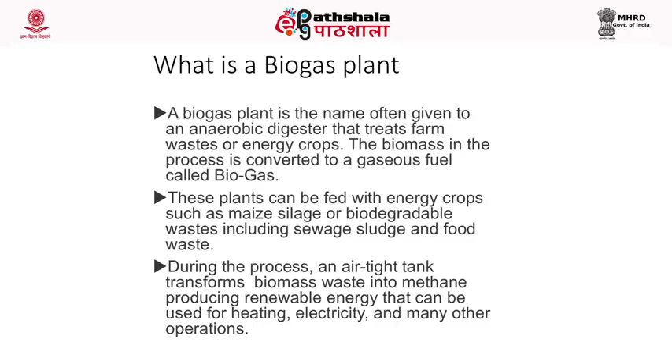The slurry obtained from the biogas plant is richer in nutrition and is an excellent organic farm manure. The next is the type of biogas plant.

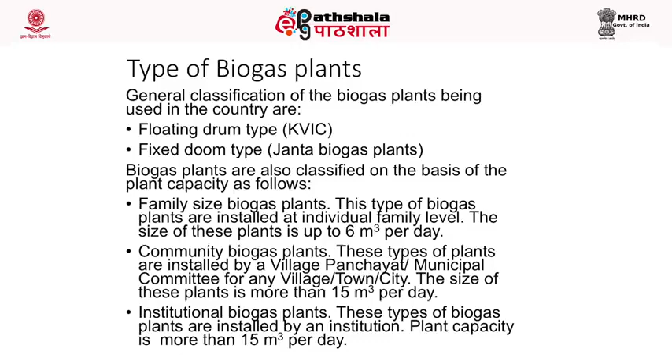The most important types of biogas plants used in India are Janta fixed dome type, and the second is KVIC floating drum type biogas plants. This Janta biogas plant is further divided into Deen Bandhu fixed dome type plant and Shramik Bandhu biogas plants.

Now the KVIC plant, which is a floating drum type of plant, has an initial cost of installation that is much more. KVIC means Khadi Village Industry Commission, and its initial cost is a little higher.

Cost of repair and maintenance during operation is relatively high. The steel gas holder needs to be replaced due to corrosion effect, generated due to water vapors and some organic acids formed during the anaerobic digestion process. Life of the digester is expected to be 30 years and that of the gas holder is 5 to 7 years, meaning it needs replacement after every 5 to 7 years throughout the life of the biogas plant.

The drum which is exposed over the ground does not allow the use of space over the plant for other purposes.

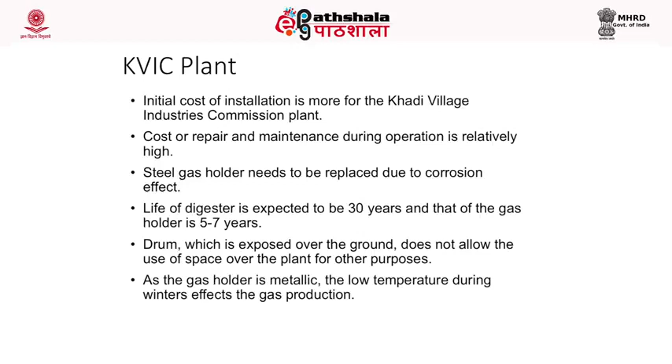As the gas holder is metallic, the low temperature during winters affects gas production. This means because of the lower atmospheric temperature, the temperature of the slurry drops due to the metallic gas holder, and the low temperature affects gas production and the bacteria as a whole. The gas production in winters drops significantly in KVIC plants.

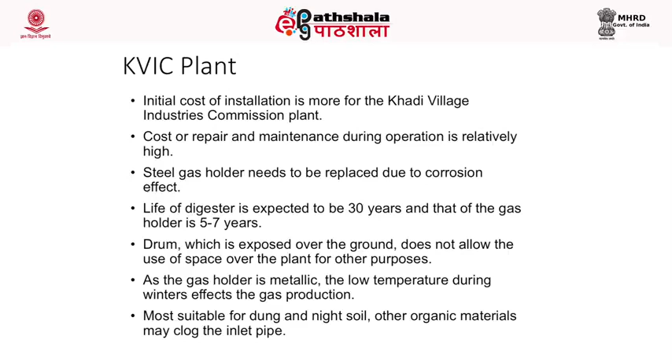It is most suitable for cattle dung and night soil and other organic material, and may clog the inlet pipes. So crop residues like straw, etc., if not properly ground, can cause operational problems in KVIC plants. But it is suitable for animal excreta and night soil.

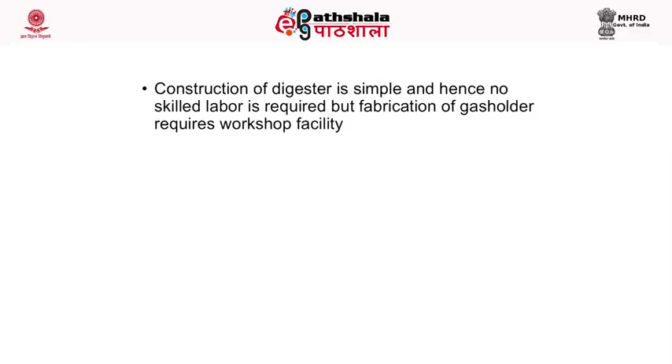Construction of the digester is simple, hence no skilled labor is required, but fabrication of the gas holder requires workshop facility. It requires less excavation work during installation.

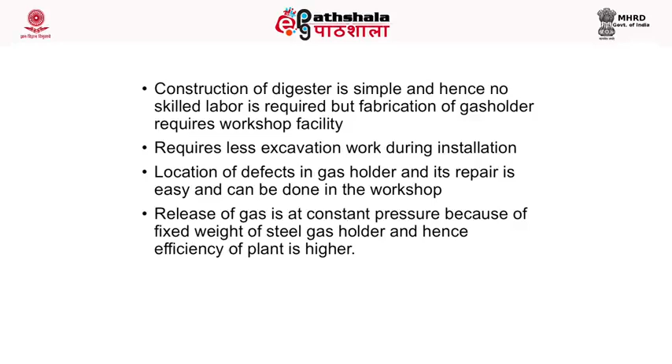Location of defect in gas holder and its repair is easy and can be done in the workshop. Release of gas is at constant pressure because of fixed weight of steel gas holder, hence efficiency of the plant is higher. Now these are some photographs of the KVIC biogas plants.

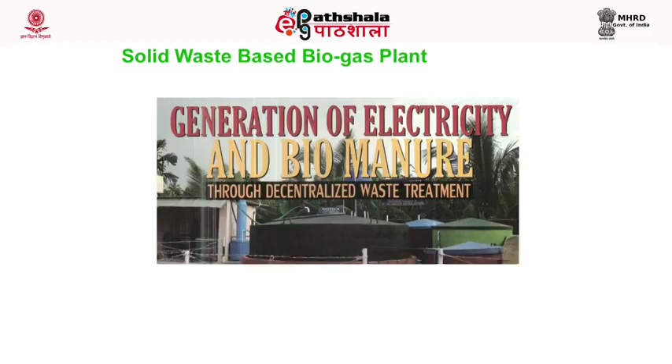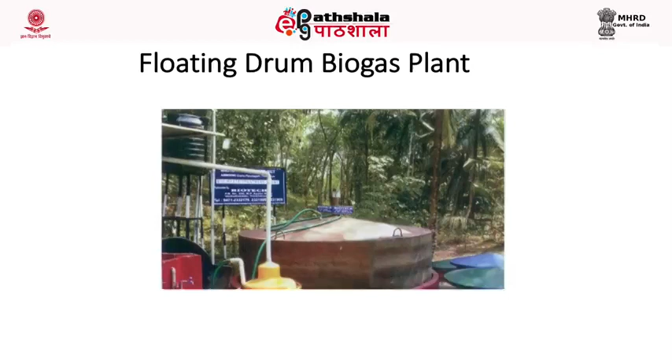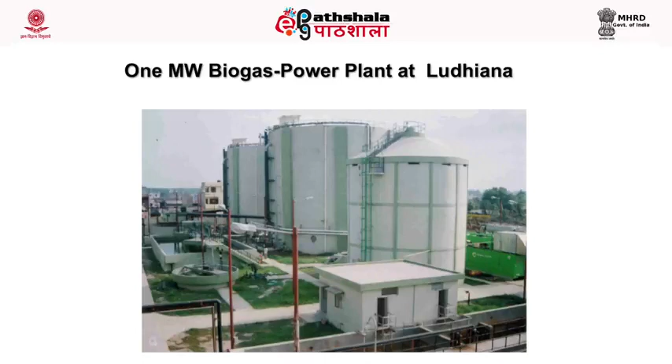Now this is another biogas plant, having a capacity to generate gas for operating a 1 megawatt engine. This whole plant is a 1 megawatt electricity generation system using biogas, and is operational at Ludhiana. The feedstock for this biogas plant is dairy waste.

Now the main characteristics of fixed dome type biogas plant: capital investment for a corresponding size of KVIC plant is less. As there are no moving parts, the maintenance cost is low. Steel gas holder is not required. Life of the plant is expected to be comparatively more.

As the unit is underground, the space above the plant can be utilized for other purposes. The effect of low temperature, especially in winters, is less in fixed dome type biogas plants as compared to KVIC plants.

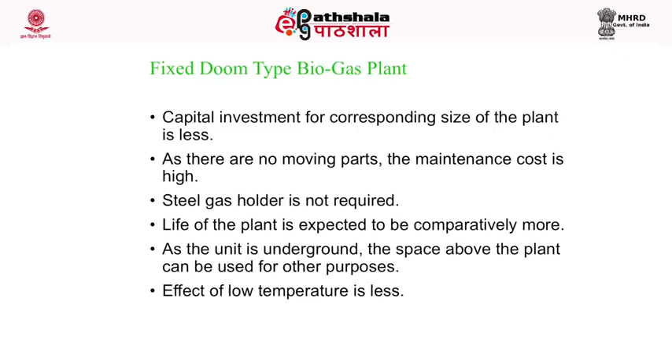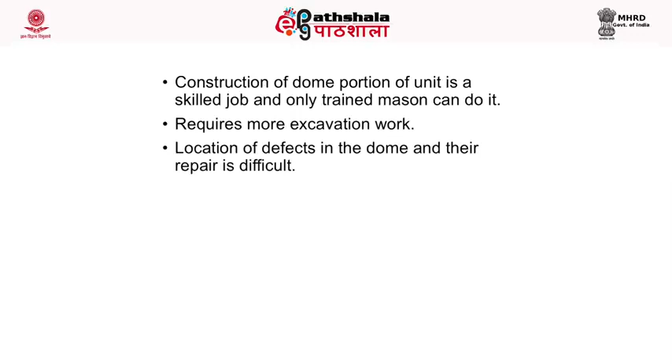Construction of the dome portion of the unit is a skilled job, and only trained masons can do it. It requires more excavation work. Location of defects in the dome and their repair is difficult. Release of gas is at variable pressure, which may cause a reduction in efficiency of the gas appliances. However, it could be easily modified and adopted for use with other types of organic waste.

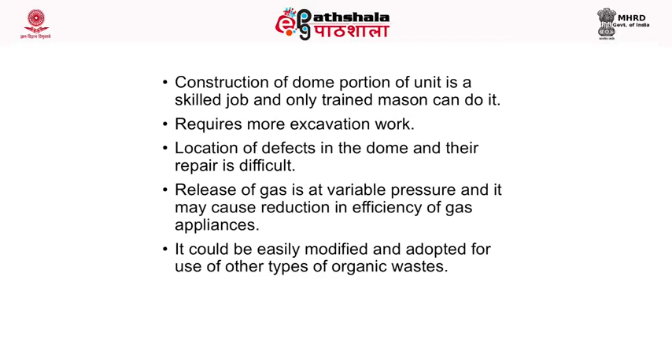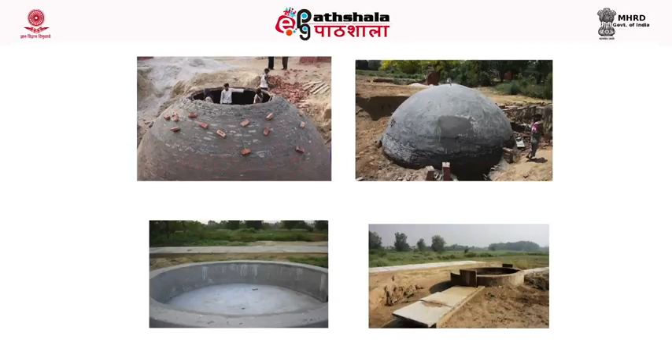These are some photographs of the fixed dome type biogas plant. This picture shows the different construction stages of a fixed dome type biogas plant with a capacity of 100 meter cube.

Now next is: what is biogas? Biogas typically refers to a gas produced by the biological breakdown of organic matter in the absence of oxygen. Biogas is produced by anaerobic digestion or fermentation of biodegradable materials such as biomass, manure, sewage, municipal waste, green waste, plant material, and energy crops. This type of biogas comprises primarily methane and carbon dioxide.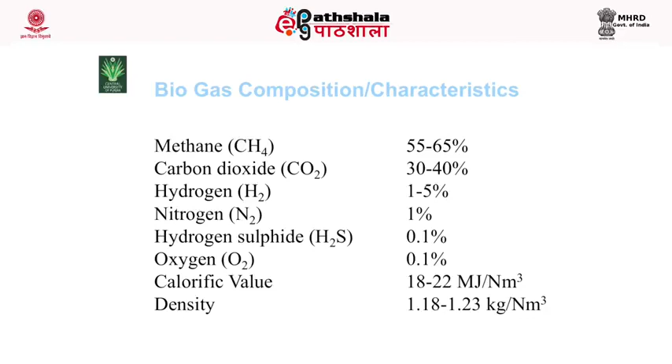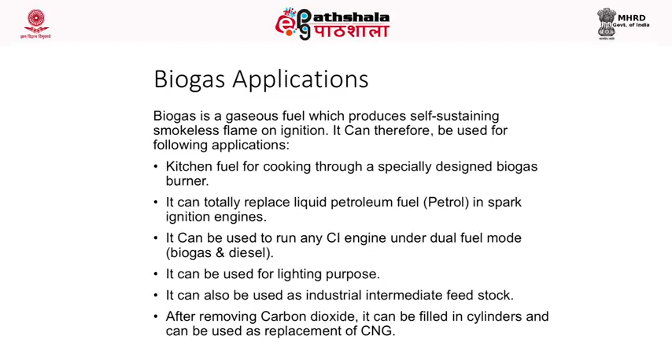Now, the parameters for designing a biogas plant are also based upon data available in the literature. The dung obtained from one cow is 15 kilogram per day, and the dung contains a total solid content of 16%, and biogas production from the dung is 0.04 meter cube per kg of fresh dung.

Hydraulic retention time is considered as 40 days. In fact, this is a function of the atmospheric temperature. In hilly regions, where the ambient temperatures are lower, the hydraulic retention time is considered as 50 days for completion of the biogas production cycle. In other plain areas, it is 40 days.

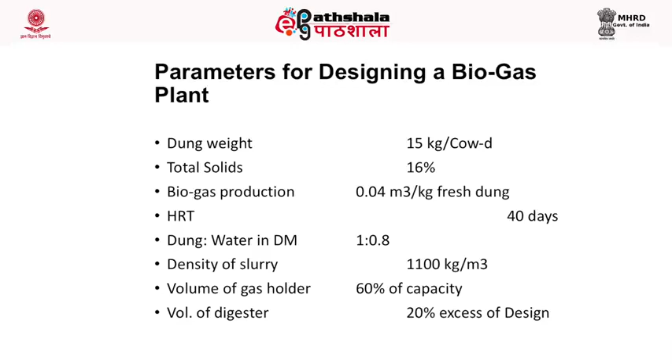Now, for preparing the seed or feed slurry for the biogas plant, the dung to water ratio is 1 to 0.8, and the density of slurry obtained is 1100 kilograms per meter cube. Volume of gas holder, for a KVIC plant, is 60% of the total capacity of the plant, and for the volume of digester, whatever we calculate, keep 20% in excess of that design value.

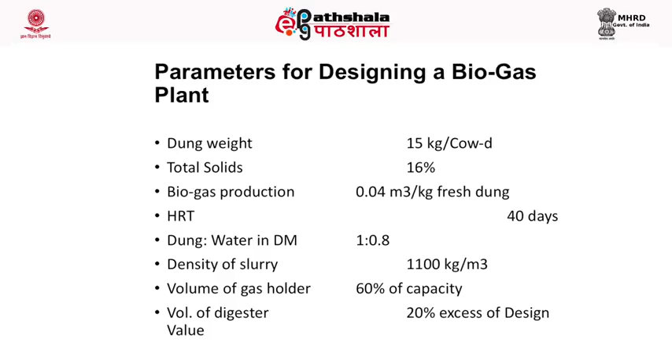Now, this example shows the design of a biogas plant for meeting the cooking requirement of a family of 6 adult members, running an engine generator of 5 kilowatt capacity for 4 hours a day. We have to determine: A, the quantity of biogas required per day; B, quantity of cattle dung and number of cattle required; C, the volume of biogas plant gas holder; and D, the volume of digester.

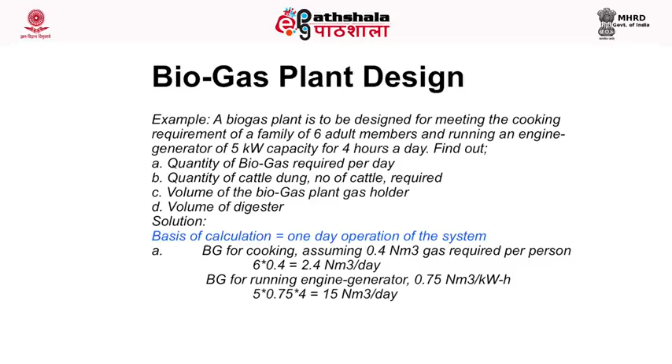Now, for solving this problem, consider the basis of calculation as 1 day of operation of the system. Biogas for cooking, assuming 0.4 normal meter cube per person per day, comes out to be 2.4 normal meter cube per day for 6 persons.

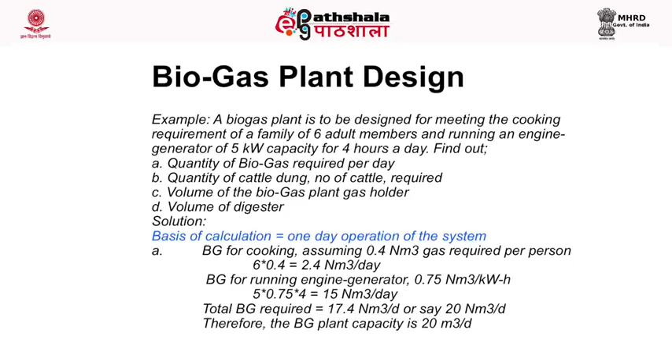Now, considering the operation of a diesel engine generator set consuming 0.75 normal meter cube of biogas per kilowatt hour generation, the total gas requirement for running a 5 kilowatt engine for 4 hours a day comes out to be 15 normal meter cube per day. The total biogas required for these two applications comes out to be 17.4 normal meter cube per day, or let us say, for design purpose, 20 meter cube per day. So this means we have to design a biogas plant for 20 meter cube per day of total gas production.

Now, B is the cattle dung required, assuming 0.04 meter cube of biogas production per kilogram of fresh dung. The total dung required comes out to be 500 kilograms, and considering the 15 kilogram of dung produced by one cattle, the total number of cattle comes out to be 33.3, or let us say 35. So 35 cattle are required to produce the dung, which is enough for producing 20 meter cube of gas per day.

Water required to prepare the digestion mixture or seed slurry, assuming 80% of water required based on the weight of the dung, comes out to be 400 kilograms, and the total weight of the digestion mixture, thus 500 plus 400, comes out to be 900 kg.

Now, volume of the digestion mixture per day is the total feed slurry digestion mixture divided by the density, which is assumed as 1.1 grams per centimeter cube, and the total volume comes out to be 818 meter cube.

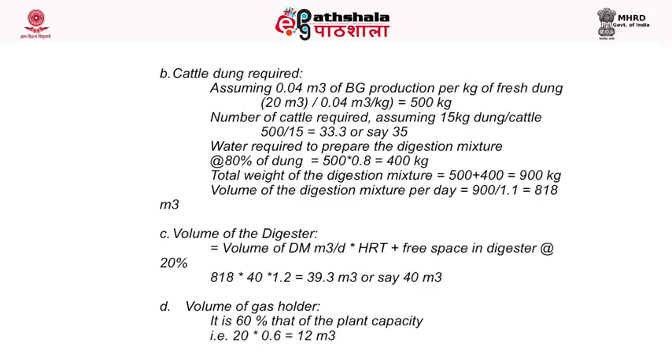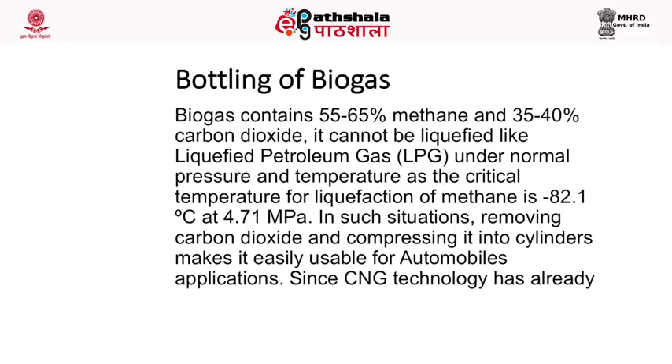Now, the biogas which is generated from the biogas plants contains 60% methane and around 40% carbon dioxide. Now, the carbon dioxide from the biogas generated from the plant can be processed to remove the carbon dioxide, and that removal can take place by means of water scrubbing at high pressure, followed by chemical absorption to remove the carbon dioxide. Once the carbon dioxide is removed from the biogas, it is more or less methane, and its characteristics resemble that of natural gas.

It can be used as a fuel in kitchen for cooking purpose. It can be used for running automobiles, and it can also be used as a fuel in stationary engines, as in case of compressed natural gas.

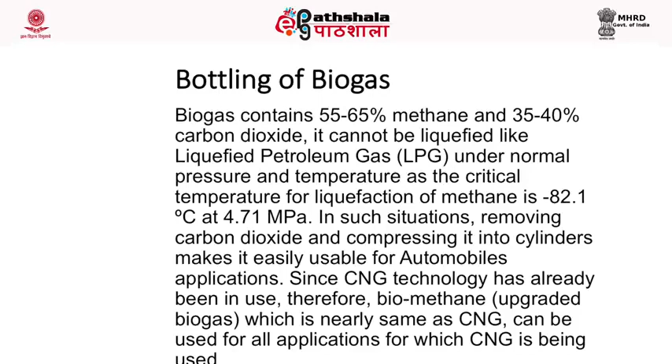Now, some uses of biogas: visible improvement in rural hygiene, environment benefit on a global scale, protects the Earth's natural resources, renewable and decentralized energy source, widespread availability of dung in rural sector of the country, eco-friendly energy production, boon for the rural economy.

Biogas can be used for thermal application. It can be used as a fuel in furnaces, in small and medium industries.

It can be used as a fuel for cooking in domestic sector. It can be used for running the engines, meaning it can be used to run a spark ignition engine on the gas alone, and it can be used as a supplementary fuel in any CI engine or diesel engines.

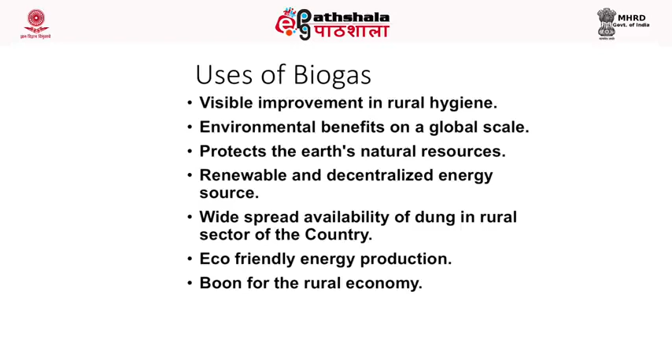Now, the main raw material for biogas production is animal dung. Its traditional application is the production of dung cake and the application of dung cake as the fuel in domestic sector for cooking purpose.

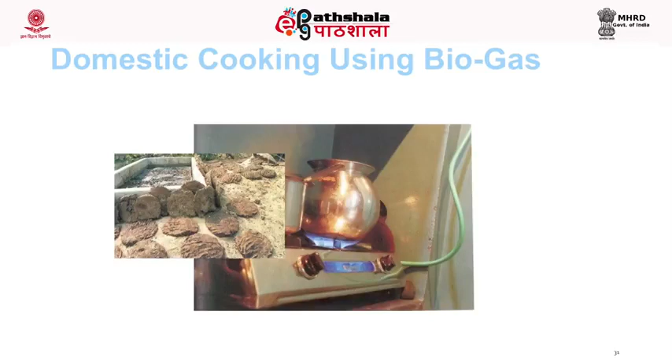Second, efficiency of combustion of biogas for thermal application is much higher compared to the combustion of dung cake in biomass cook stoves. Biogas is the product obtained during the anaerobic digestion of animal dung and some selected crop residues.

Now, these materials are traditionally used as a fuel and manure in a very inefficient way. If the same material is used after anaerobic digestion, it is converted into biogas, and the residual slurry, which can be used as farm manure, is much richer in nutrients compared to the original waste material. And the biogas can be more efficiently utilized as a fuel in the domestic sector.

It can be used for running the engines, and it can also be used as a feedstock for some of the chemical industries. Thank you.